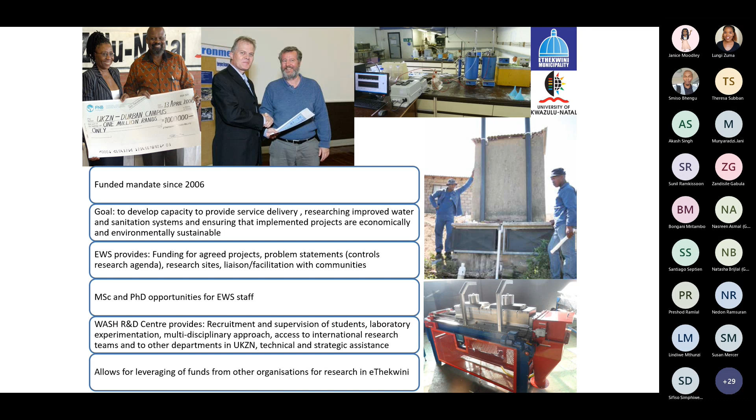So thank you very much, Sifiso, over to you. Thank you very much, Lungi, for that brief overview - that was very nice and precise. I will call on our next speaker, who is Akash. Akash, I'm handing it over to you.

Thanks, Sifiso. Hi everybody, my name is Akash Singh, and as Sifiso and Lungi have mentioned, I'm a chemical engineer with Process Engineering Services, and I'm going to give you a brief overview of our modeling initiatives and the collaboration between EWS and WASH, previously PRG.

From a municipal context, we find that we have a lot of challenges, and you can see just a few of them up on the screen. Now, in order to understand a problem, or in order to solve a problem, we need to understand it, we need to unpack it. And while the challenges you see in front of you are quite different and quite broadly defined,

what we found is that there is a common approach to understand and resolve them. It almost always consisted of some sort of data manipulation or data understanding, gathering, and modeling component. And we found that there's often an interconnection between the problems, either through the data requirements or a common solution approach.

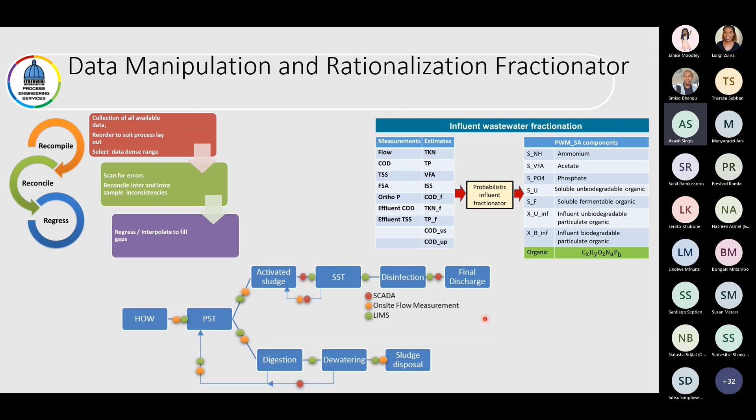So together with UKZN WASH, we've developed tools to fill in the gaps between the data, tools like the probabilistic influent fractionator. And these type of tools actually negate the need, for the most part, to go through expensive sampling and monitoring programs. And that removes a barrier to entry for modeling. Removing that barrier to entry has actually allowed us to develop what we call skeletal models - sort of baseline models for our wastewater treatment works.

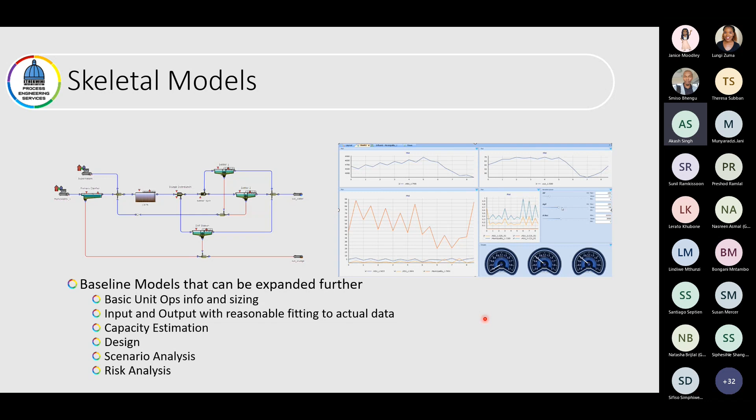We've developed the tools to very quickly put these together, and we can do things like basic input and output, capacity estimation, design calculations, scenario analysis, risk analysis. We can go as finely as adjusting or optimizing flow rates in a treatment works and seeing how the system reacts, almost like a digital twin type of model.

Or we can virtually take units offline to see what the impact is, do some sort of failure analysis, see how far and how long we can keep a unit offline before it negatively impacts the treatment works. So this is the type of very granular process engineering work that this collaboration has been focused on.

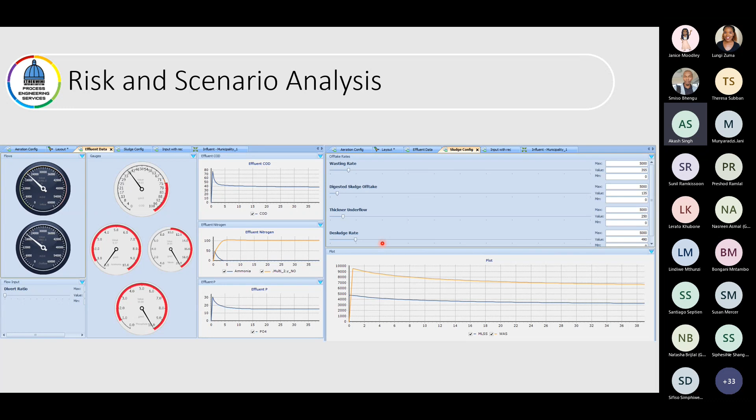But we have been looking outwards because of the nature of the work we're doing. We're looking at the treatment works and what are the impacting forces and inputs. What we find is you can have informal settlements, unaccounted for water, infiltration, pipe breaks. There's a whole lot of information we don't understand about the catchment, and that has pushed us into a wider view of modeling. That led naturally to the concept of integrated modeling, which is the union of many complex models - for example, linking climate change models to stormwater models, to wastewater models, to river models, to give us a holistic view of the situation in a given city or catchment.

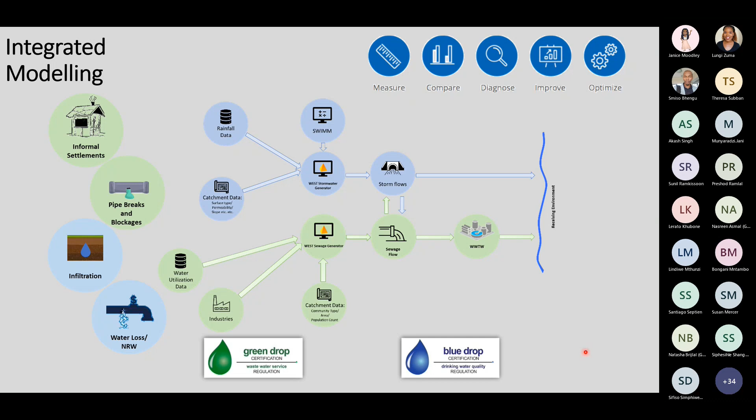This is our latest endeavor through the WRC. We're developing the framework and tools to develop these integrated catchment models, again using that skeletal model approach, to help us better understand our systems, with the ultimate objective being decision support.

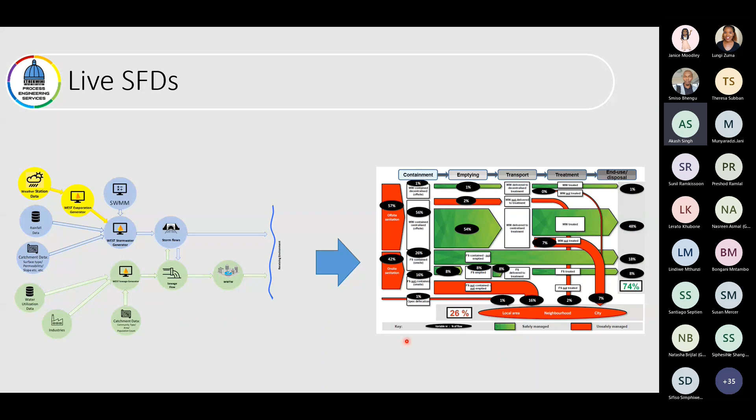What we would like to do is take those integrated catchment models and convert them into live SFDs, sewage flow diagrams. Sewage flow diagrams have become quite topical - it's a visual representation of wastewater treatment in a given catchment that gives a good understanding of what's happening. Our goal is to convert the modeling outputs into this sort of live SFD, where we can open up a dashboard and look at what's happening in the city, or what's predicted to happen, in terms of wastewater treatment, and use that as the decision support tool.

As Lungi alluded to earlier, we've been heavily involved with collaboration with other organizations, and we've produced quite a bit of papers nationally and internationally, presentations, workshops, etc., with WISA, IWA, etc. There's a large body of work specifically tailored to wastewater treatment modeling, and now broader integrated catchment modeling as well - so much so that EWS, together with the university and University of Cape Town, are actually founding members of the WISA Modeling and Data Division. This is a division of WISA focused on promoting the use of models and support for modeling and data interpretation in the water sector, spearheaded by the collaboration between EWS, UKZN, and other academic organizations.

So that's the general overview of what we've covered and the collaboration. I just want to talk a little bit about taking the modeling aspect forward. Chris Brouckaert, who's a permanent collaborator with Process Engineering Services and has mentored a lot of us in modeling, is very fond of saying all models are wrong, but some models are useful - that's a quote by George Box.

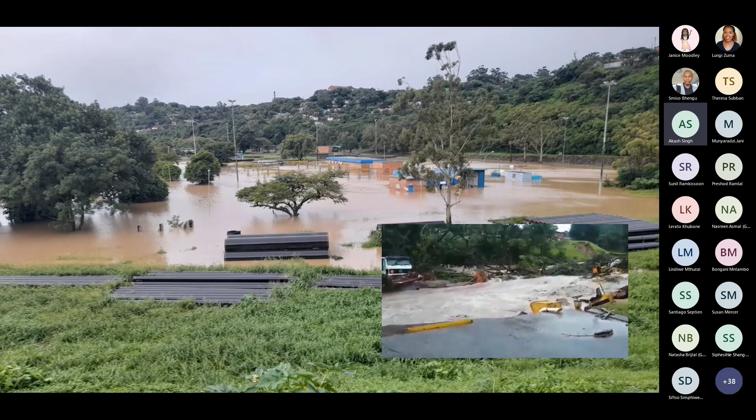Needless to say, we can't talk about eThekwini without talking about the horrible run of bad luck we've been having recently. The video you see at the bottom is of the Umbilo treatment works. You can see our northern treatment works basically underwater, so there's an immense amount of damage that has occurred. Ironically, 2 hours before this video was taken, all of the process engineering services guys and the UKZN guys, including Professor Brouckaert, were actually sitting at the Umbilo treatment works working on our modeling workshop while the floods were coming, and we just escaped the works before this washout.

And of course, even without the floods, we've got a lot of aging, unmaintained infrastructure that will prevent full adoption of the nice-to-have optimization scenario application for modeling.

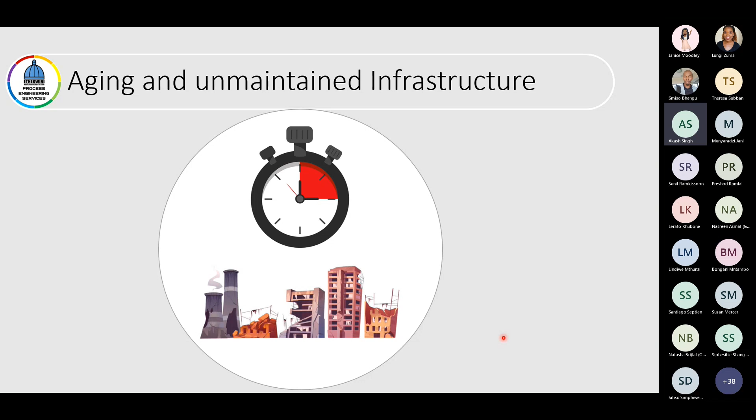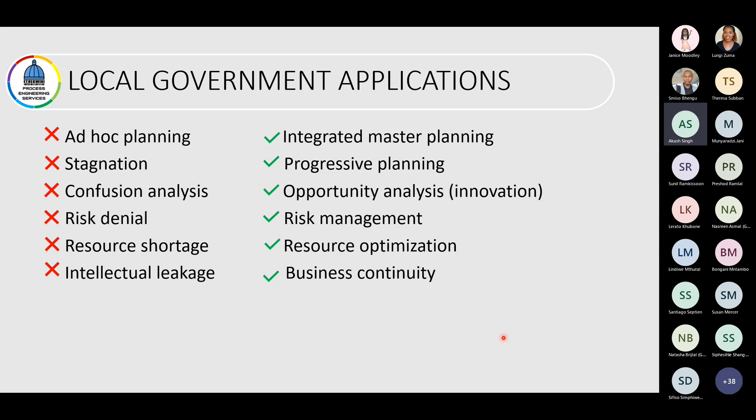And to prevent intellectual leakage and move to a state of business continuity. This can be done by a fit-for-use approach, using models for a purpose, and developing models for the purpose they are intended for. That means model complexity can vary depending on the application. There's potential for reuse and repurposing of existing models, and potential for synergy amongst different organizations and different units.

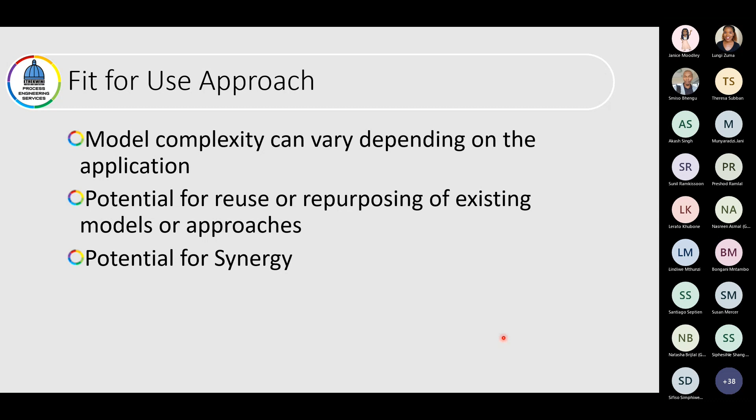Importantly, and in conclusion, all models are wrong, but they can be useful for decision making. This does require an extensive and interactive process from the organization. Decision makers should be involved from the start and throughout, and the organization needs to be as dynamic as the models we develop.

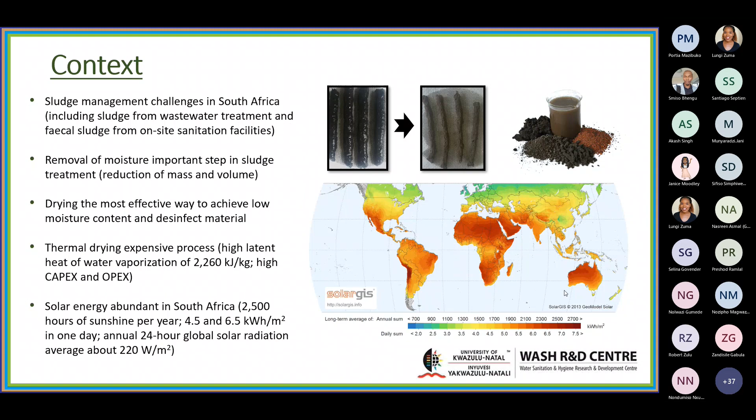So what is a solar thermal dryer? The basic components of a solar drying system are basically: we want to capture the sun in an efficient way, so for that we need an enclosure where we're going to put the material to dry. This enclosure is going to protect it from outside conditions like rain and wind, and will avoid heat losses.

Usually we can use a transparent material for the walls of the enclosure. This way, the sun can pass through it, but it will be captured by the greenhouse effect. Inside the system, we can put material that can absorb the solar and thermal energy, which I call absorbers.

Also, it's very important to have a ventilation system, because the material is going to dry and the moisture is going to be transferred from the solid to the air. So it's important to evacuate it from the system, and important also to have air circulation to enhance the mass transfer. It's important also that there are gradients of air, like wind, inside the machine, which will allow it to dry faster by increasing the mass transfer. And for sure, we need some thermal insulation, piping, and instrumentation.

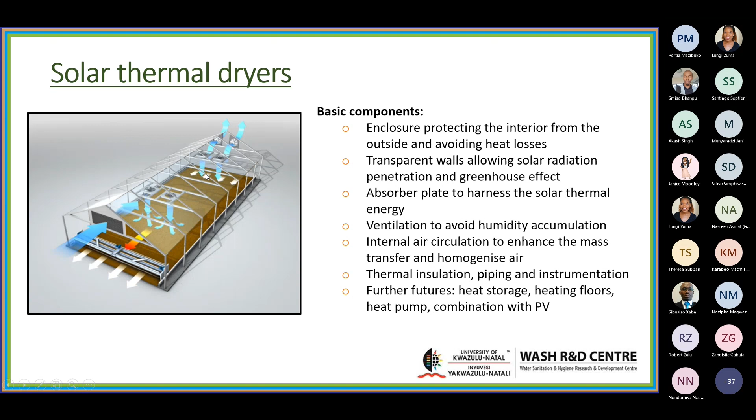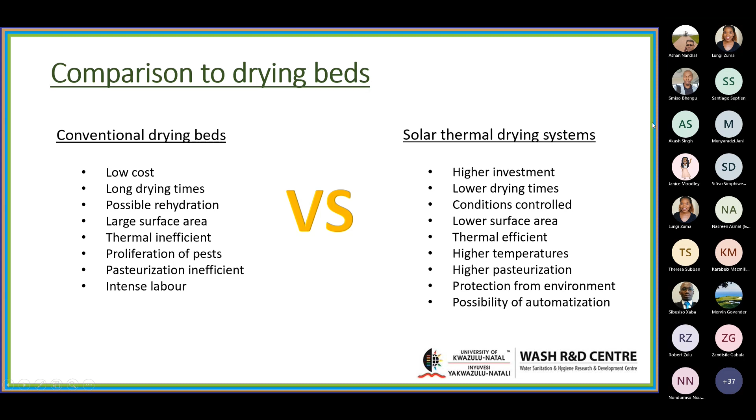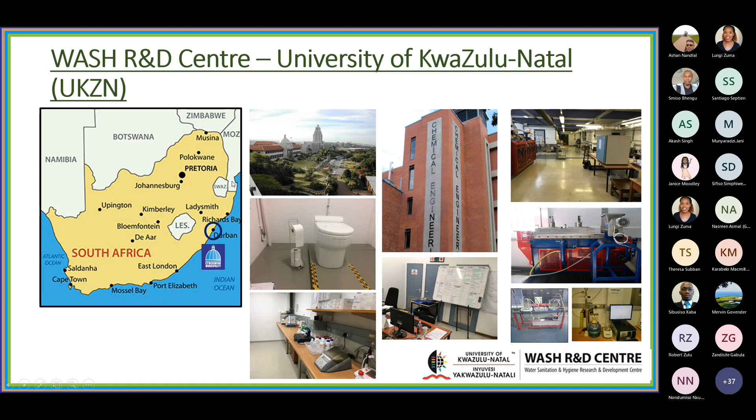So here is WASH R&D Centre, well, we already know it. Here we developed a program about solar drying. A few years ago, we developed a research and development program for sludge solar drying, and we wanted to develop systems, solar drying systems, that could later be implemented in a community, or in an EWS system, or in a wastewater treatment plant, something that can be scalable. This way, we can put it in different places, but also it can be downscaled. So it's important to be able to downscale it if we want to implement it at a community level.

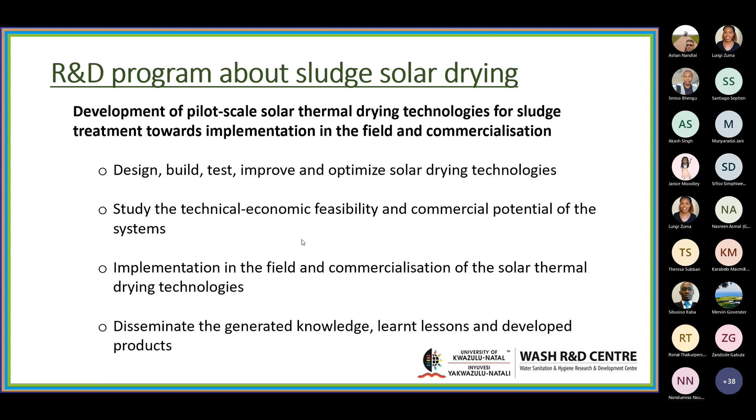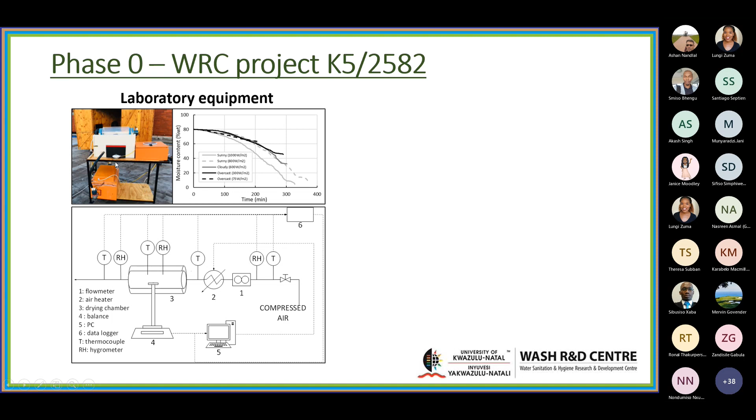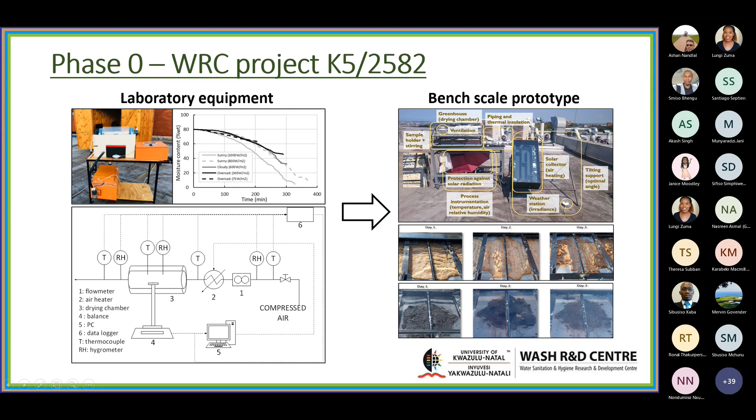So yes, this project finished, and we get some understanding of the process. We get some parameters of which temperatures we can achieve in this kind of system, the drying rate we can achieve, the performance, how much energy we could use, the electrical energy to run the fans and all the electrical equipment, and also to identify different challenges. So this is what we learn a lot from this project.

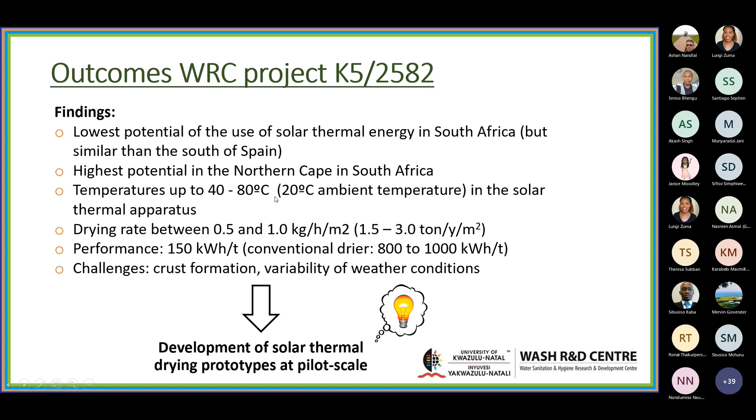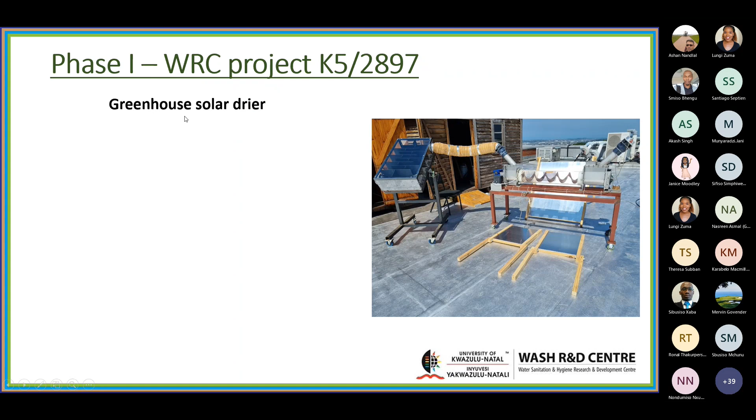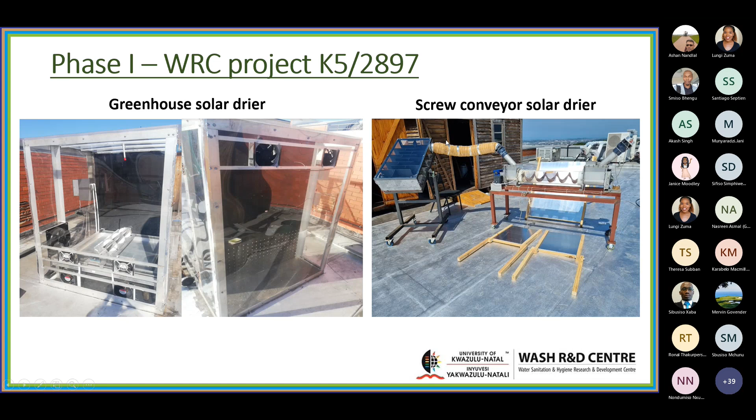And from this project, we had the idea to try to apply this into developing something more real. So here is the second phase of the solar drying project, also developed and funded by the Water Research Commission under another project. We developed two systems: a greenhouse solar dryer, which is like a proper small greenhouse, and another screw conveyor solar dryer. This was developed with the concept by me, but the students also participated. There were two master students who worked each on one prototype, and we had the help of our skilled technician to build all this equipment.

Part of this project was to make a proper solar assessment in Durban. We got data from different years of solar energy - we have a solar station at the mechanical engineering building, so we could get this data online via internet. We tried to get all the data for the different months and years, and make an average.

We also got solar maps, like this solar map of South Africa. We could note that Durban is in the cooler area of the country - not the hottest part - but still it's quite good. The values are in the range of Greece, or the south of Europe, or north of Africa. So it was still quite good.

With these values, we managed to do some extrapolation. For example, we could see that we could dry from 4.3 to 7.7 kilograms per day per meter square of moisture, with an average of 6 kilograms per day per meter square. That's what we could dry theoretically with the sun of Durban.

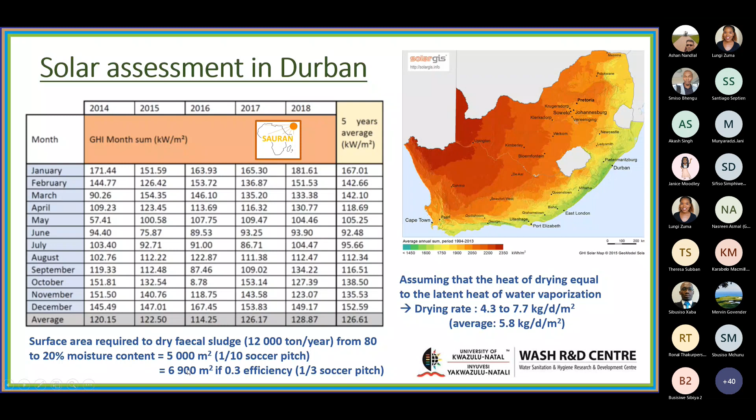Then, how much surface area would this require to dry the sewage sludge? For example, to dry 12,000 tons per year, which is approximately what is produced by the VIP, drying it from 80% to 20% moisture content, we would require a surface of 5,000 meters square - which is one-tenth of a soccer pitch - not enormous, quite acceptable. This is if all the sun's energy is used to evaporate, but that's not the case - there's always efficiency losses. If we consider an efficiency of 0.3, which is normal for a thermal system, we would require approximately 7,000 meters square, which is one-third of a soccer pitch, to dry all the VIP sludge from Durban. So it's quite decent.

The sludge is placed at the bottom on a support, and we developed a rack system. In a conventional drying bed, sometimes a crust forms at the top. Here, this rack system avoids the formation of this crust, and it also homogenizes the different layers in the bed of sludge. This way we get a more homogenized material, along with circulation fans.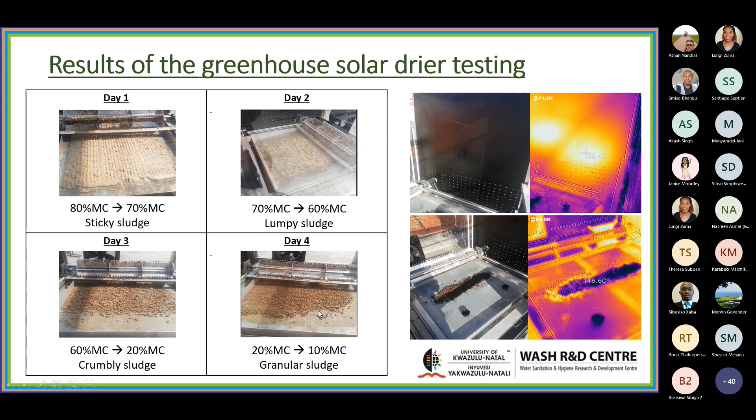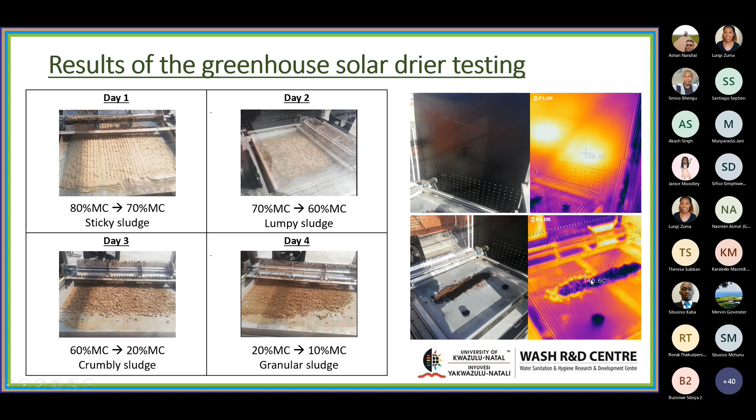And here are some pictures we took with a radiative camera. As I told you, the absorber wall can get very hot, up to 40 degrees, and the sludge can also get quite hot, up to 50 degrees. So it's a good temperature to pasteurize the sludge.

Then we have the other system. The sludge is going to be placed in this screw conveyor, conveyed inside this tube. But this tube is transparent, so it's going to be heated by the sun. There's going to be air, which can be dehumidified and preheated with this equipment, also by a solar collector, homemade. We can put reflectors on the sides to increase the amount of solar energy in the sludge.

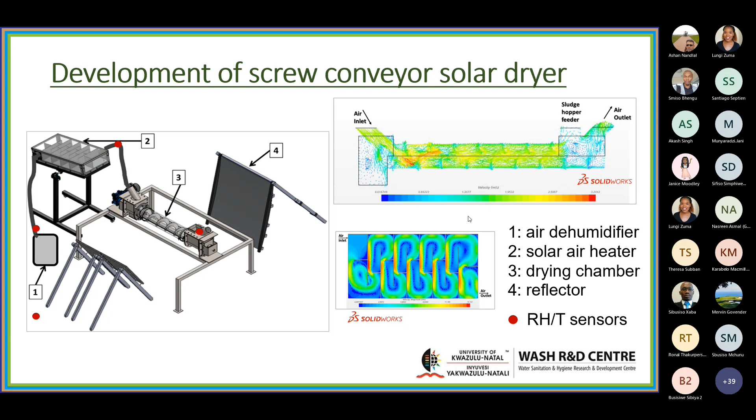And here we can get high temperatures. You can see here even 70 degrees. Here's a photo, we can see it. So here, very similar to the other side.

After 3.5 hours, we reduce the sludge from 80% moisture content, which is synthetic sludge again, not real sludge, down to 50% in 3.5 hours. The sludge was very sticky, so we had a lot of conveying challenges in this area. We reduced these challenges by adding a little lime, which has an effect to reduce stickiness, not enormously, but a little improvement in the convey. We also tested charcoal and sawdust, but no effect.

And then when the initial moisture content was 65%, we managed to reduce to 45% after 3.5 hours, and the sludge was lumpy. So it was a little easier to convey, but not as easy, still some challenges.

At the end, we did some experiments with 50% initial moisture content sludge, and after 3.5 hours we reduced it to 30% moisture content. Here the sludge was more crumbly, was solid, and it was conveying perfectly and dried very well.

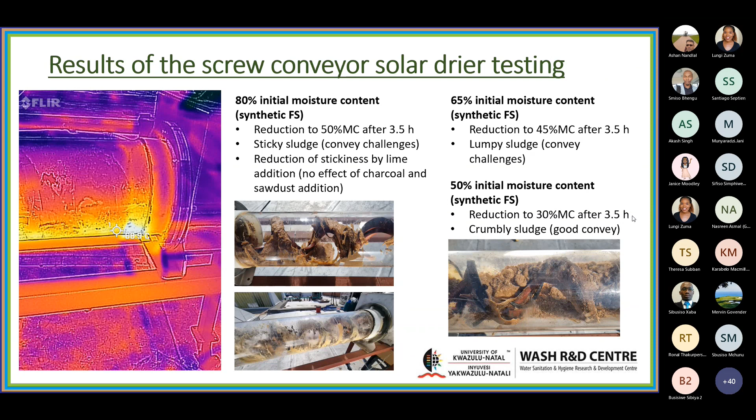So after this, we tested different parameters: the effect of ventilation, air circulation, the rake system in the greenhouse, the dehumidifiers, air heater, and reflector, as you can see here in this graph.

For the greenhouse, what we note is that the optimum conditions were when the ventilation and the air circulation rate were low. So it's important to have a little ventilation and circulation, but the optimum results were at low flow rate, because at high flow rate the system tended to cool down, reducing the drying. It's important to have a little air to evacuate the moisture, but not too much, because we will also evacuate the heat. The rake system led to faster drying by homogenizing it.

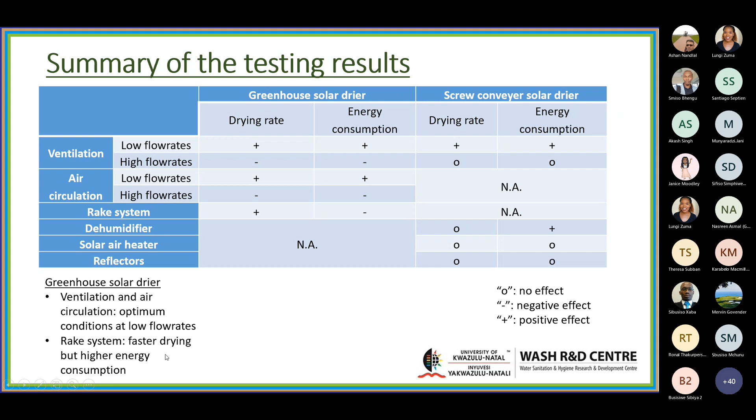However, the rake system leads to higher energy consumption, which is normal because it uses motors. So we use a little more energy, but we dry faster.

For the screw conveyor solar dryer, similar to the ventilation, it's better to use low flow rate just to remove the moisture. The solar air heater has a positive effect because it brings more heat to the system. The reflectors had no real effect. The dehumidifier has a negative effect - it didn't really affect the drying, but it uses a lot of energy, so it's a component we have to remove because it's not necessary.

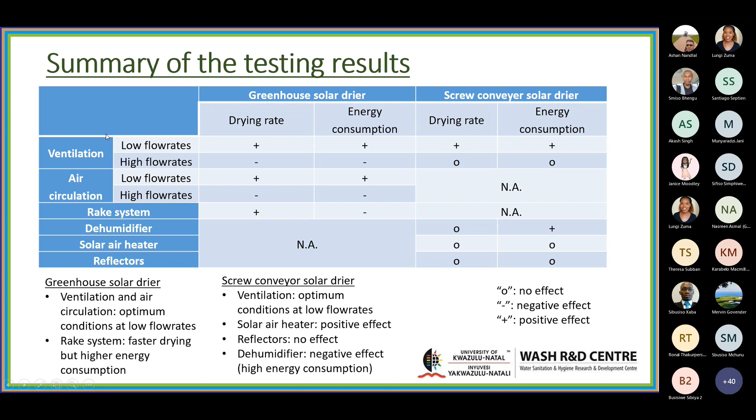Some results we got: we saw that we managed to get 10 to 15 degrees more inside the solar dryers with respect to the ambient conditions. Some days we even managed peaks of 50 degrees of air inside the greenhouse. So we managed to get high air temperatures - the temperatures I showed you before were from the materials, not the air. But we managed to get air temperatures of up to 50 degrees on very hot days.

The specific energy consumption, defined as the kilowatt hours to evaporate 1 ton of sludge, was inferior to what conventional thermal dryers use, which is between 800 and 1,000 kilowatt hours per ton. So we managed to get lower SEC, which is very good, and the efficiencies were also quite good for some cases.

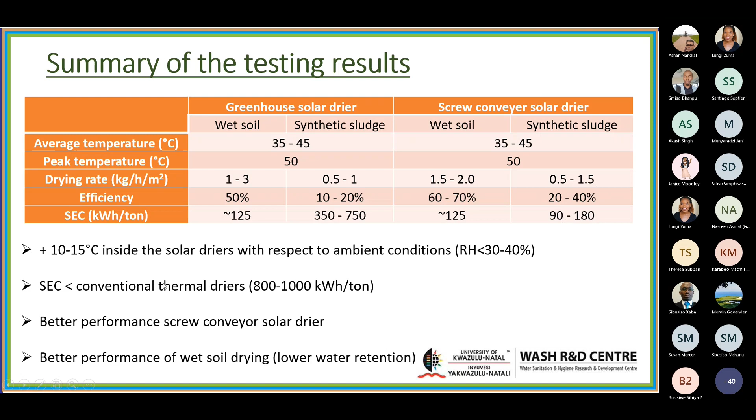We could see that the screw conveyor solar dryer has a better drying performance, but it was more difficult to handle the sludge, so it was more impractical. The greenhouse was more practical, but the results were better with the screw conveyor.

We could see that we also tested wet soil. I forgot to tell you that we tested wet soil and synthetic sludge, and wet soil was much easier to dry. That is why we have higher efficiencies and lower SEC, because the wet soil is much better. Actually, we expect real fecal sludge will be closer to wet soil than synthetic sludge, because in synthetic sludge the water is very bound.

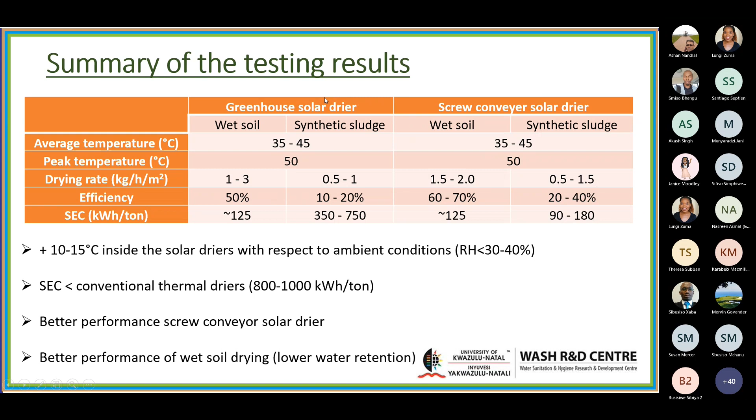And then I will make a techno-economical analysis. Already these values are in dollars, but I have the values in rands if you're interested. So I made a small techno-economical analysis. There were a lot of assumptions, so it's not very precise, just very rough.

It was based on how much it costs to dry the pit latrine sludge in the eThekwini municipality, which is 12,000 tons per year approximately, to dry it up to 20%, which is a value that can be considered safe. It's solid, looks like soil, and we could see that you have very low running costs.

So to treat 1 ton of sludge will be $34 for a greenhouse dryer, and $9 for the other, for just 1 ton of sludge. And this is quite low.

However, this is normal because we only use a little energy. We don't use energy when you dry — most of the energy comes from production of heat, but here the sun is providing us this heat, so we only have to use fans, electricity to run the fans, instrumentation, and some motors. So it's quite low, all electrical and mechanical things which use a little bit of energy.

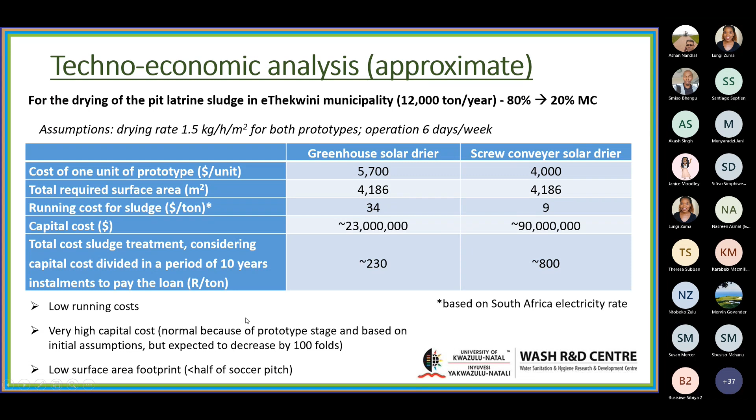Something very good we could see is that both systems require a low surface area footprint, about half of a soccer pitch. So the conclusion is that there is great potential because we have low energy consumption, low running cost, and low surface area footprint. We expect in the future to improve the systems, and through improvement and optimization of the operating conditions, we will decrease the running and capital costs.

We also have areas of improvement and optimization that we found in the entire pilot. For the next round of tests we already identified what we can do: we can optimize the recirculation system, and we can optimize the ventilation, decreasing its size, because we saw it doesn't need to be as strong — it can be very mild, so we can reduce the size, reducing the running costs. There are many things we can improve; we already have some hints where to go, and we expect to decrease a lot of the cost.

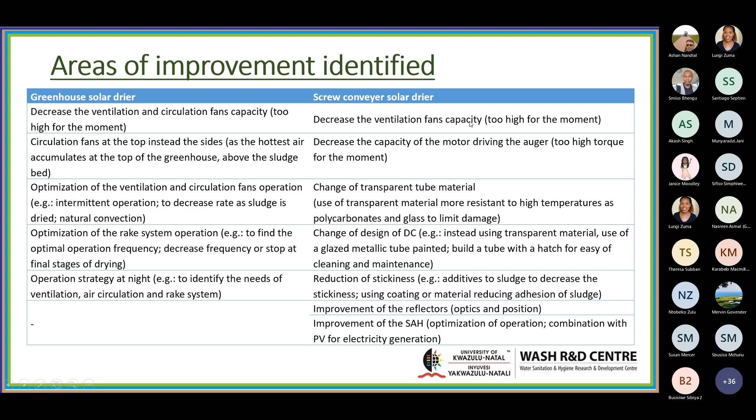So the next phase, phase 2, which is where we are now.

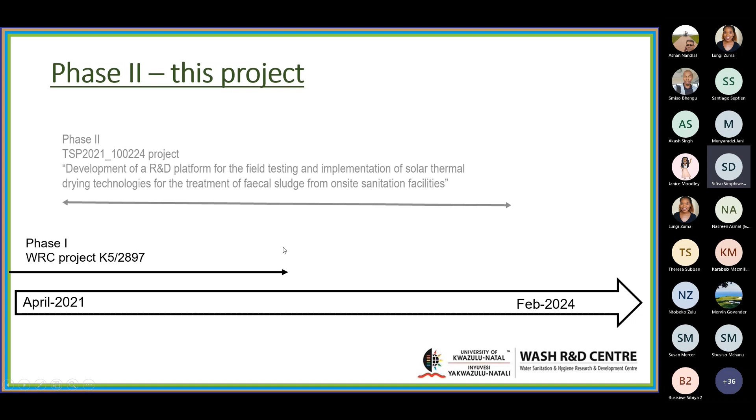Doctor, you've got 2 minutes. Okay, no, that's perfect, yes — almost finishing.

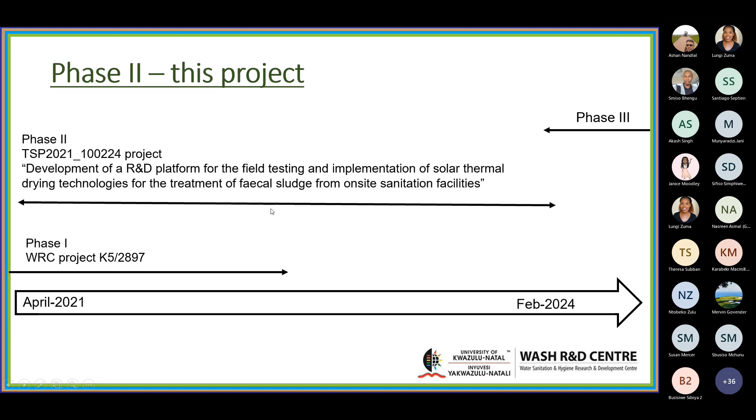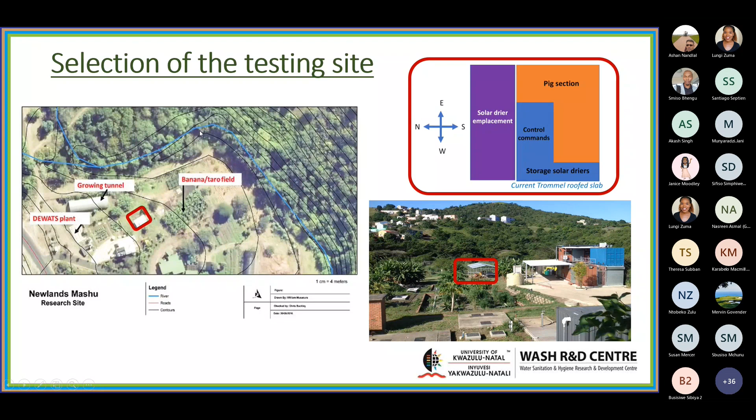So here we go, this is the second phase — we're starting it now, to test these new technologies with the Royal Academy funding. Here is some planning: the tests are going to be done at Newlands Mashu. We already selected the field and are just preparing it, so we're going to develop the Newlands Mashu place to test the solar dryers.

Here there's going to be many more people, but what's interesting is that Mervin Govender, an engineer from eThekwini municipality, is doing a part-time master's with us. He's going to be involved in the prototype testing, as well as Trishandra from Umgeni Waters, another part-time master's student, who will also be involved in testing the prototypes.

So that's what we wanted to test. We'll try to make several iterations, and with these iterations we want to improve the system. We also want to do CFD simulations — apart from the tests, we have a partnership with Swansea University, who are experts in CFD simulation, to see how we can improve the system using that tool, plus the data we get from the field.

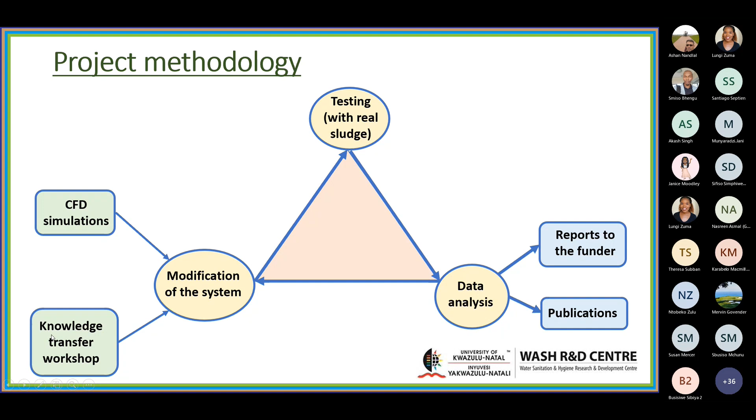So then phase 3, we hope to start this year with more commercialization. We hope to arrive at an optimized and good design of the solar dryers this year, and to talk with the WRC next year to see how we can go forward, also incubate from UKZN, or TIA, there are many possibilities that you can help us with there, and eThekwini. That's it, thank you very much.

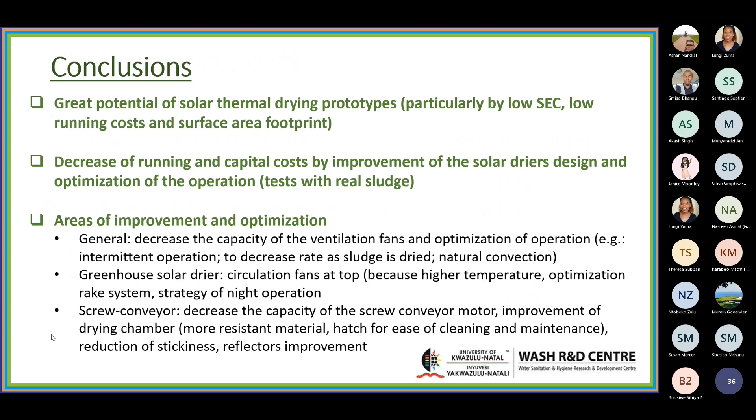Thank you so much, Dr. Santiago. I think that was a very detailed and quite interesting presentation, very insightful. I think it actually says a lot about the caliber of evidence-based research that is currently being undertaken at UKZN in collaboration with the city.

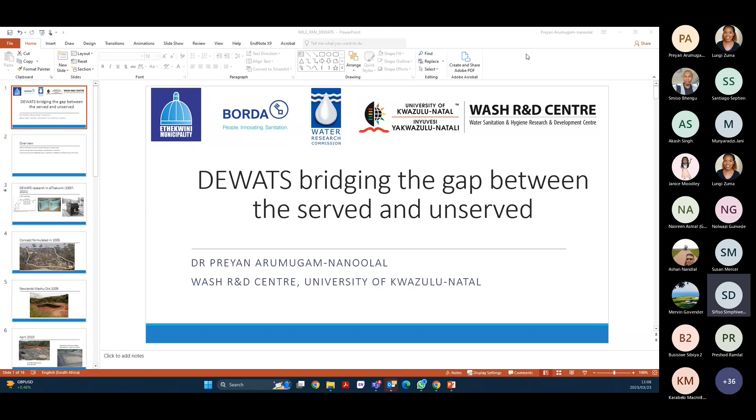Morning everyone, and thank you for your patience. I must apologize for the technical glitch, but I'm hoping you'll be able to understand more about DEWATS and its history here in eThekwini. So the title of my presentation is DEWATS: Bridging the Gap Between the Served and the Unserved.

This mainly relates to a sanitation solution towards providing sanitation services for those communities within urban and peri-urban areas that technically do not have any sanitation services, or have temporary sanitation services, looking towards bridging that gap between those that do not have any services and those who have.

So I'm just going to give you an overview of what the presentation will be like, providing a history of DEWATS research in eThekwini, which started all the way from the 1990s in terms of concept forming and design of such systems, the lessons we learned from the first demonstration scale decentralized wastewater treatment system in eThekwini, and the steps going forward in terms of bridging this gap.

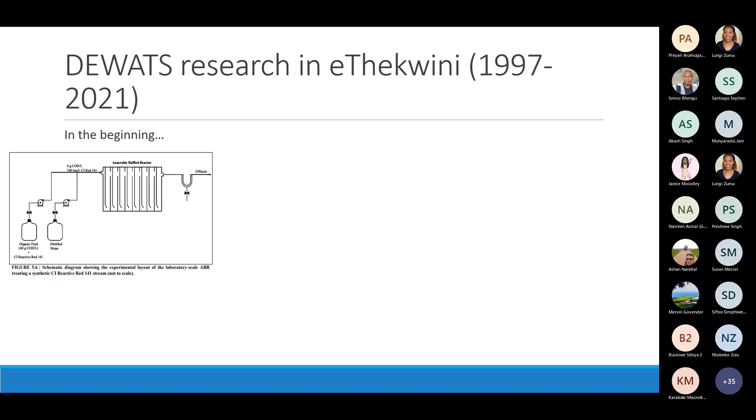It went on to a laboratory scale system looking at a 5-liter lab scale ABR. Essentially what this system does is that the raw wastewater enters into the chamber, and as it baffles through the walls that act as baffles, there's sedimentation of the organic matter, and the wastewater is treated by the anaerobic bacteria present within the reactor.

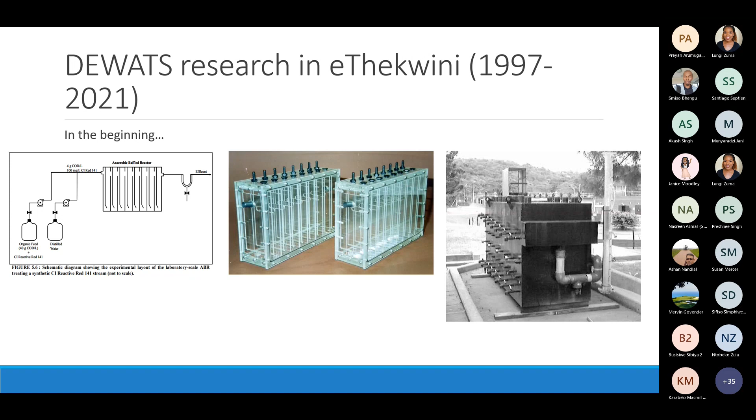And then it ended up in 2001 with a pilot scale system at the Kingsburgh wastewater treatment works. The idea really started with looking at the unserved and informal communities that became more densely populated within the urban and peri-urban fringe, within fast-growing cities such as eThekwini. This is mainly due to rapid urbanization, which is often uncontrolled, with these communities essentially looking for better livelihoods, access to jobs and services, and a better lifestyle.

Often in terms of providing services for these communities, although alternative technologies may be more apt, providing waterborne sanitation is not always feasible, based on the fact that if these communities lie outside the sewer boundary, it does not make practical sense to extend and provide the capital costs for extending that sewer network. However, most of these communities still desire waterborne sanitation, in the sense of a flushing toilet, which is often regarded as the gold standard in sanitation provision. This sometimes pressurizes municipalities into providing these types of toilets at the household level.

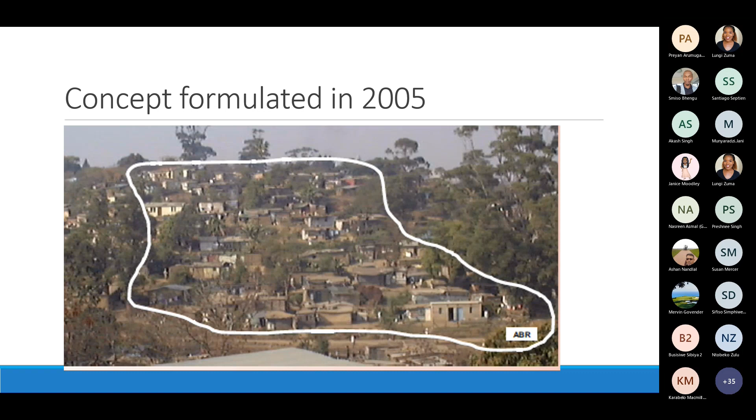What is nice about the eThekwini municipality is that it gives researchers like us the opportunity to apply our research in the field and understand these options under real life conditions.

It started off with the Newlands Mashu Research Site, which is a community slightly west of Durban Central. The site was commissioned in 2010.

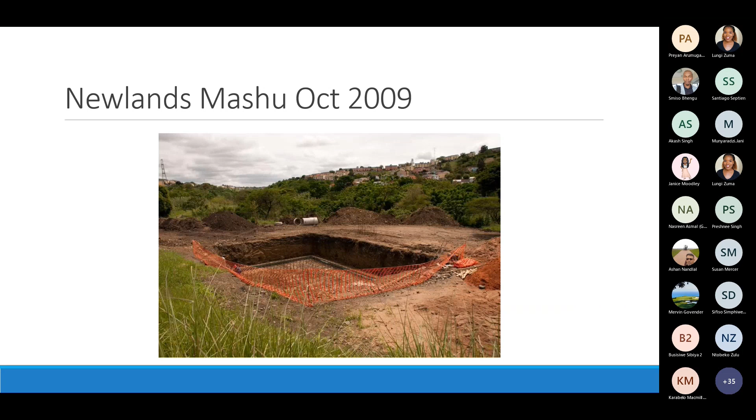It started off with the laying down of an anaerobic baffled reactor, which was then connected to an anaerobic filter. Essentially, an anaerobic filter is a two-chambered system, can be a single chamber, that includes gravel media at the bottom that further allows for the degradation of the organic matter coming in from the raw wastewater.

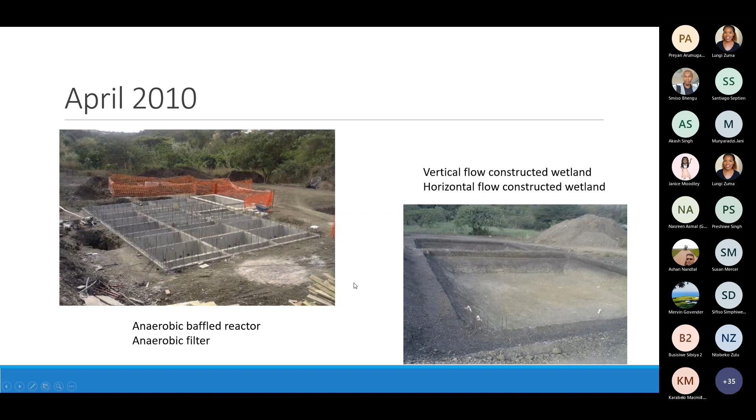The system was designed to include constructed wetlands for tertiary treatment, including a vertical flow constructed wetland and a horizontal flow constructed wetland. Essentially, both these wetlands differ by the direction of flow, looking at the hydraulic flow through the system, with vertical flowing downwards, while horizontal flow follows laterally through the system.

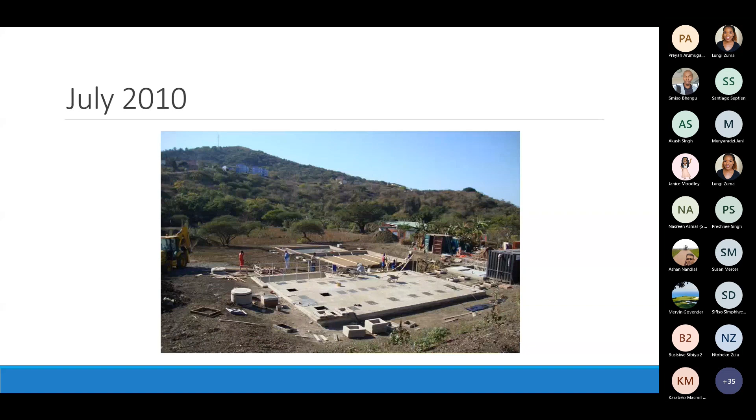Originally, the eThekwini municipality had designed the system to be integrated with agriculture, whereby the primary and secondary treated effluent from the anaerobic treatment modules, the ABR and the anaerobic filter, was to be integrated with agriculture because of the high nutrient content that came out of this secondary treated effluent.

The system currently is allowed to treat the raw domestic wastewater originating from about 84 households within the area. These were low to middle income households. It must be noted that this site, nor the community, was not selected for a particular reason based on their income or socioeconomic status, but rather due to the fact that the location of the site allowed for the raw domestic wastewater to be rerouted to the site that was already owned by the eThekwini municipality, allowing for these field trials to be conducted.

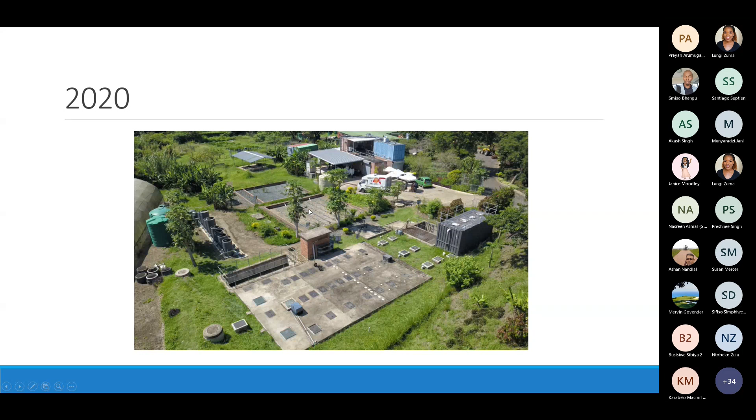In the horizontal flow wetland as well, we compacted the media and cleaned out the pipes. Originally we had just grab sampling through various points in the system, but we found it more beneficial to have composite sampling. So by 2021, we had fully operational sampling sumps at the end of the vertical flow wetland and the horizontal flow wetland to allow for a more accurate representation of the quality of effluent coming out of each constructed wetland.

There was a need to produce data on how the system worked in terms of discharge of the final effluent. In the study, we looked at the system operating continuously over a long period of time. By then it had been in operation for about 6 years, whereby the raw domestic wastewater rerouted from the 84 households flowed into the DEWATS, into a primary settler.

The primary settler allows for the settling of solid matter, and has an access point for scum removal. Unfortunately, with South African communities, and based specifically on the type of diet we have, we find that the scum produced has a high fat, oil and grease content, which forms a very thick layer on top that needs to be removed weekly.

Thereafter the supernatant flows into the ABR, then into the anaerobic filter, and then into a mechanical dosing device referred to as a siphon, which intermittently feeds the vertical flow wetland. Based on the design of these wetlands, they are intermittently fed to allow for the highest treatment efficiency, which targets ammonium removal.

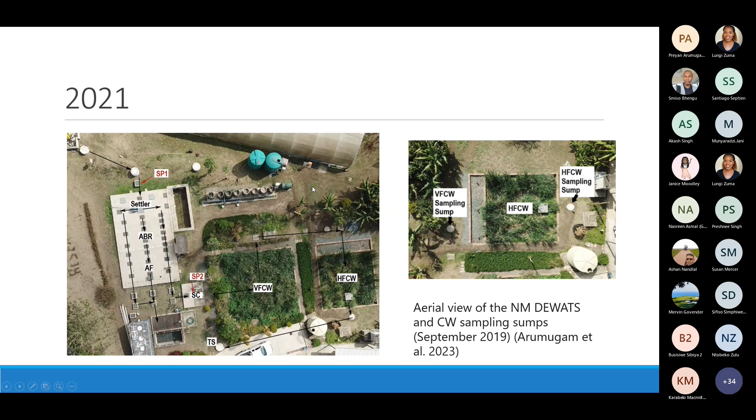The purpose of this study was to build on our prior assessment of integrating DEWATS with small-scale agriculture. The focus of my PhD was to look at the entire system and determine whether the effluent quality is safe for discharge.

This study took some time, and unfortunately with the COVID pandemic we had interferences in our sampling campaign. But this gave us an idea of the effluent quality through the system. This data was taken in 2019, before the COVID pandemic, and we performed a 16-week performance evaluation of each module of the DEWATS to compare the final effluent quality.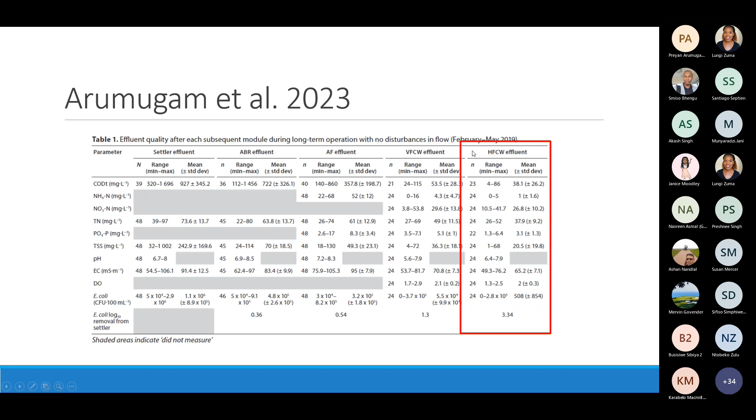What we did here after the COVID pandemic was compare the horizontal flow constructed wetland effluent under continuous operation, with no breaks in the flow, to the COVID pandemic period, when due to the absence of technicians on site, descumming could not occur. Interestingly, on the day the national lockdown occurred, there was a blockage on site which prevented any flow going downstream into the DWATS for treatment for more than 162 days.

So when we returned to site after that, we removed the blockage and the system was allowed to restart. We evaluated the final effluent after about 9 weeks of operation, just to compare the effluent quality and the time it takes for the system to start up.

If we compare the organic fraction, and this is just COD, so the biodegradable and non-biodegradable fractions, we see that the chemical oxygen demand is still within the general authorization limit.

We couldn't really say much about the ammonium concentration because it was really the evaluation of the startup time in this aspect in 2020. But what we can see consistently that was fairly high was the nitrate concentration, which stipulates that denitrification was quite poor during the continuous operation of the system and during the startup or recovery performance data.

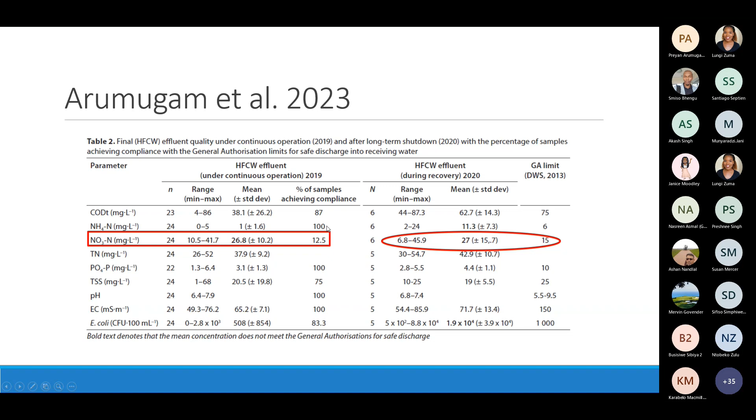So what does this actually mean? Based on the data, safe discharge of the final effluent is not possible on a continuous basis. And we identified that to be due to the design limitations of the horizontal flow constructed wetland.

When we looked at the biodegradable COD entering into... going into the horizontal flow wetland, as we know, with denitrifying bacteria, they require

carbon or organic matter, which provides the electrons required to convert nitrate into nitrogen gas. So the lack of biodegradable COD in, technically, the vertical flow wetland prevented or resulted in poor denitrification in the horizontal flow constructed wetland.

Moreover, the gravel media was mixed in the wetland, and that prevented enough hydraulic retention time. It was loosely packed and irregular shaped. So minor design limitations, but that impacted the effluent quality.

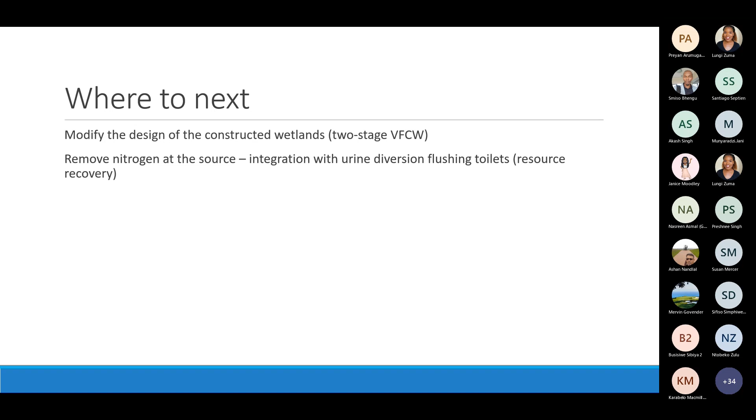Another option is to remove nitrogen at the source, such as the integration with urine diversion flushing toilets, which also provides us the opportunity to separate the urine for maximum resource recovery. This is based on some of the assumptions that Dr. Chris Buckley had formulated based on the lessons learned from European design.

And as we know from data, the majority of the nitrogen and phosphorus load from domestic wastewater comes from urine. So through the Reinvented Toilet Challenge, we were able to evaluate one pedestal urine trap, which was able to separate at least 75% of the urine.

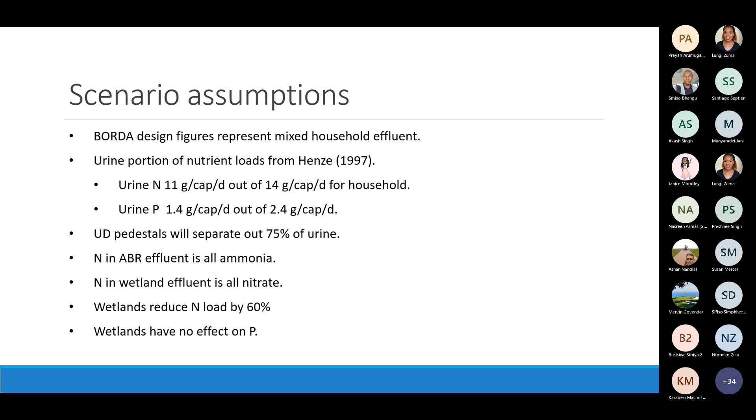So based on these assumptions, if we had to look at the combination of urine diversion flushing toilets as well as a two-stage vertical constructed wetland, we see that without wetlands or urine diversion, these are the concentrations of ammonia and phosphate that will be present in the final effluent.

Obviously, with no wetlands, nitrification is not able to occur, so that prevents the conversion of ammonium to nitrate. If you have wetlands but no urine diversion, there's full nitrification, but the nitrate concentrations are fairly high. The general authorization limit for nitrate is 15 milligrams, so looking at the maximum limit here, that would surpass the general authorization, and safe discharge is not always possible.

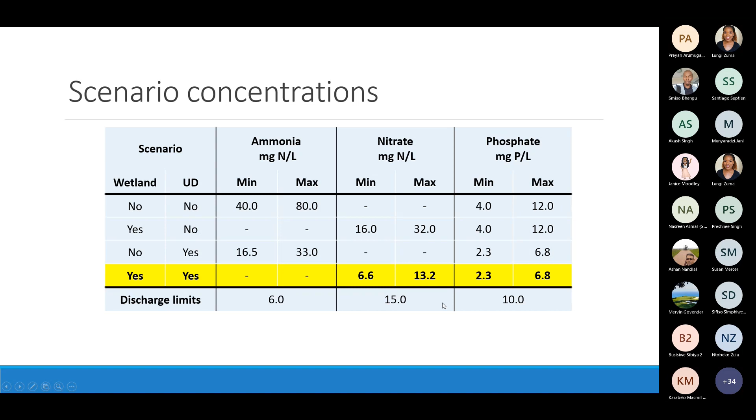With no wetlands and urine diversion, it means the same thing, that nitrification is not allowed to occur, and that can surpass the discharge limits for ammonium. But with both technologies in combination, there is a possibility that we can fully achieve safe discharge quality that can meet the general authorization limits.

Moreover, it provides the opportunity to use that collected urine in the circular economy, looking at entrepreneurs who can utilize that urine for fertilizer, etc.

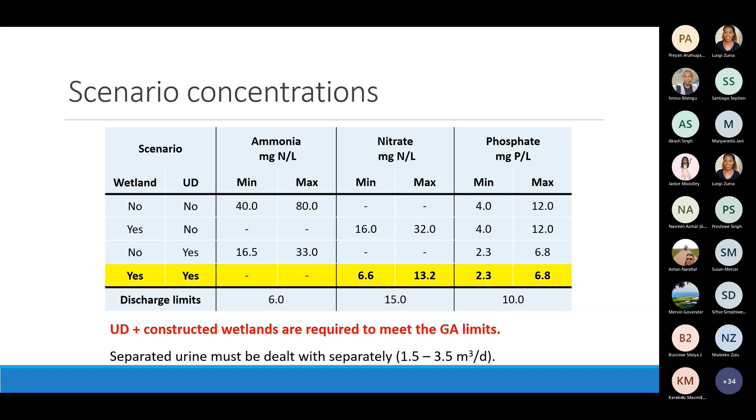So that is the end of my presentation, and I hope you're able to get a gist of the concept of decentralized sanitation. It is not a non-sewered sanitation technology, but rather a decentralized approach to fill the gap where waterborne sanitation is provided for communities, such as upgrades of informal settlements to formal housing, where waterborne sanitation is then provided and provides a solution for the treatment of that domestic wastewater.

And I know that many may argue that non-sewered sanitation is the future, and I totally agree with that. But what happens in the interim? DWATS can definitely provide a solution for treating that wastewater, providing fully safely managed sanitation services for these communities, so that the treated output, being the effluent, can be safely disposed of, or even used for watering the garden, and still in irrigation, since some nutrients are still present in the final effluent.

Thank you for your time, and I must apologize again for the technical glitch, but I'm hoping you are able to take home the importance of wastewater treatment, and that it not just sits at the toilet facility. A safely managed sanitation service moves right down to safe reuse or disposal of the treated output. Thank you.

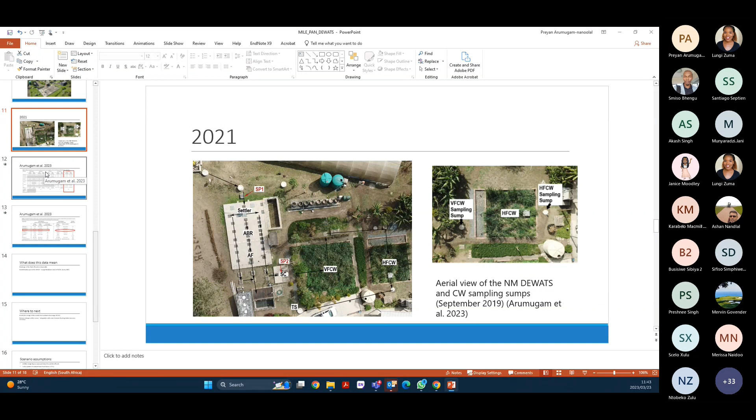I put this diagram here, and I must apologize if I wasn't clear enough. These were just looking at the different treatment modules across, and the degradation of the various parameters across the DWAT system. If it is gray, it means we wouldn't measure it because it wasn't present and it wasn't necessary to measure. We used the general authorizations, which is the revised edition, the Government Gazette in 2013.

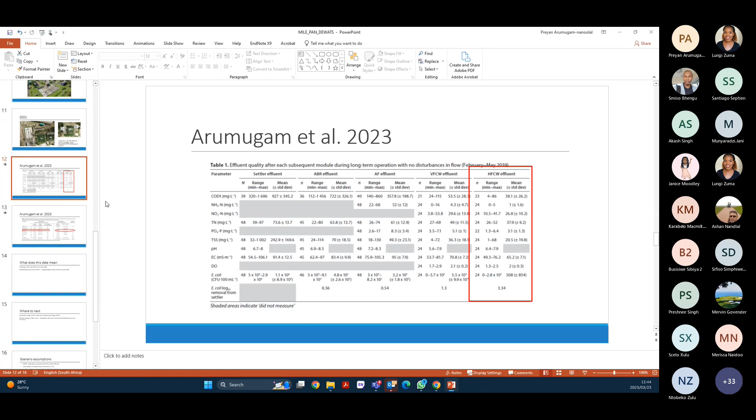Your idea of using 10 milligrams may be more stringent, but we used the one for safe disposal based on the Water Act. So yes, it is a concern, and we plan to modify the design of the constructed wetlands to allow us to maximize denitrification.

The data... sorry if I'm going overboard. It's very technical, but we are looking at it. It's not been overlooked. We are looking at the best way for us to get as much data as possible to improve the design. Thank you.